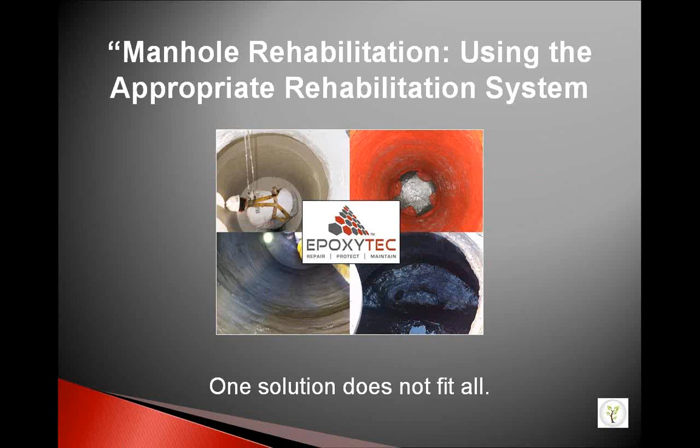So as I mentioned, manhole rehabilitation: we're going to be talking today about using the appropriate rehabilitation system, because one solution does not fit all. Okay, so I'm going to give you a brief outline now. If we can flip to slide number 2, please.

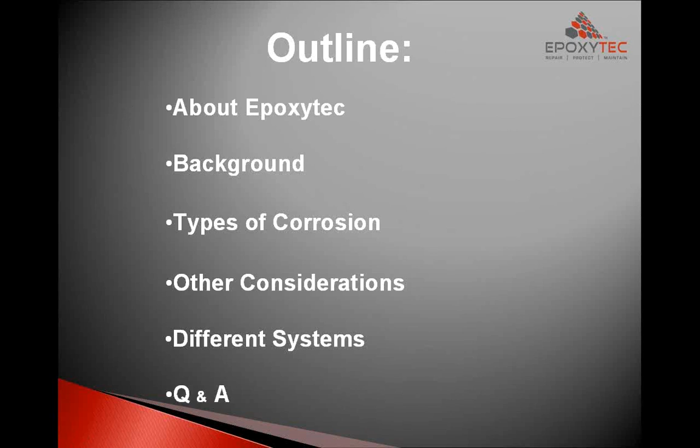I'm going to tell you a little bit about Epoxytec. I'm going to give you some background, pertinent perspective information about the industry and why it is we're discussing today. I'm going to then talk to you about some of the typical generic rehabilitation options that I'm sure most of you are familiar with or have come across at some point. And then we'll look at some of the factors that you need to consider when determining the right system or the right solution for rehabilitation.

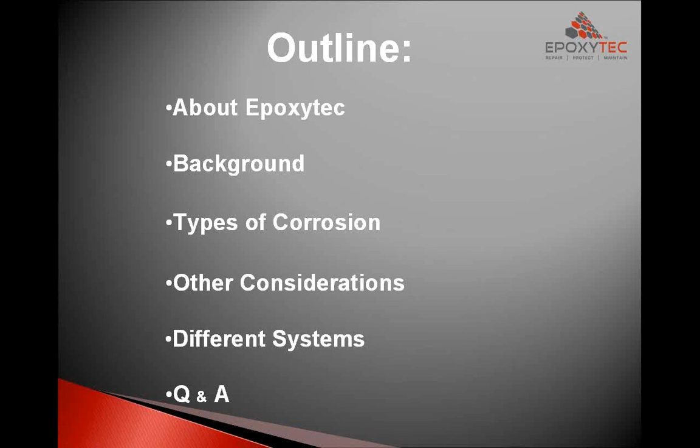And we'll look at the different systems. At Epoxytec, we came up with what we thought were 4 systems that help you meet most of these criteria. And then we will take a short Q&A to take any questions regarding any of the material that we've discussed. So, without further ado, I'm going to tell you a little bit about Epoxytec.

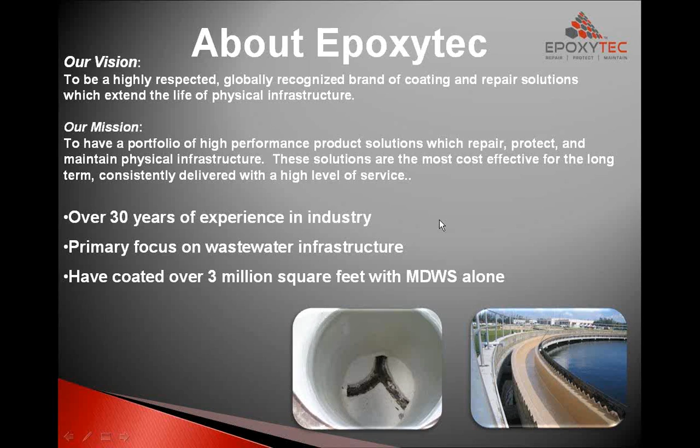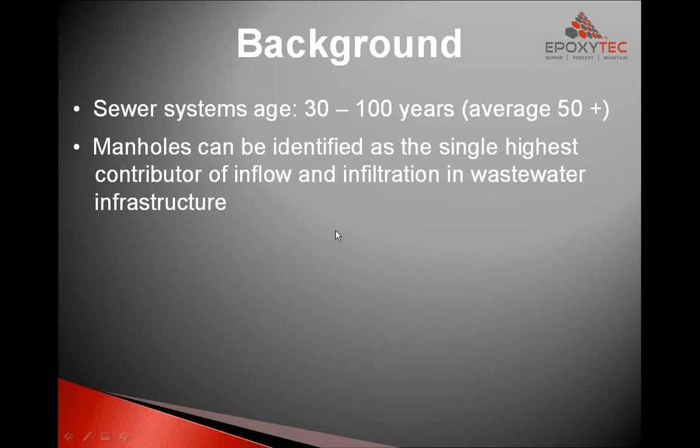Thank you. And now can we move on to give you a little bit of pertinent background that I think will help put this presentation a little more in perspective. The sewer systems in the United States are between 30 and 100 years old. And most of you are shaking your heads and thinking, yeah, close to 100 years, I know. The average is supposed to be 50 years plus. And that obviously is the problem.

Most of these systems have been designed for a 30 to 40 year lifespan, and most of them, as you probably know, are way beyond that original design life. Manholes themselves, which we're focusing on today, can be identified as the single highest contributor of inflow and infiltration in the wastewater infrastructure. There's a lot of debate about this, but there's no question they are amongst the highest. Somewhere between 30 and 60%, depending on which statistic you quote, of inflow and infiltration is actually caused at the source of a manhole.

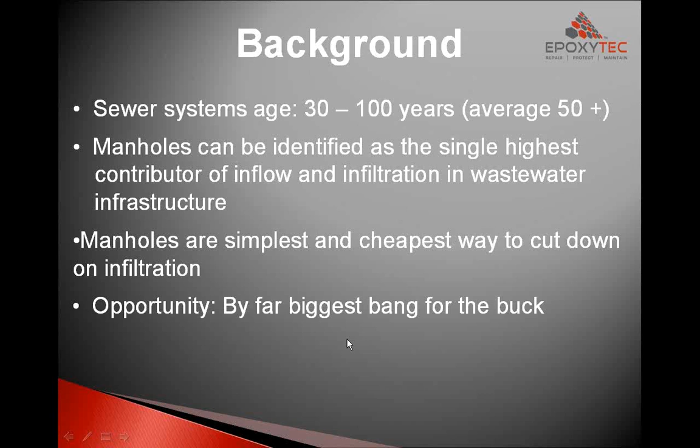Manholes, however, are the simplest and cheapest way to cut down on infiltration, and therefore we have an opportunity here. By far the biggest bang for your buck can be spent on rehabilitating your manholes. Simply put, if you want to save the capacity, maintenance, and expansion cycle of the most complex and expensive part of your wastewater infrastructure, namely your wastewater treatment plant, you can do this by simply investing smaller amounts of money in the infrastructure which is the simplest out there, namely your manholes and manhole rehabilitation. Okay, let's move along.

Let's briefly look at the types of corrosion that we experience in the wastewater infrastructure system. As I mentioned, inflow and infiltration is a big one. A lot of people want to rehabilitate manholes for the simple reason that they have major inflow and infiltration. When we talk about inflow and infiltration, it's affected by sea tides if you live near an ocean or lake. It's affected by the amount of rain you have, groundwater.

All of these items cause hydrostatic pressure to be placed on the outer structure of the manhole. Manholes are typically made of brick or concrete, which as we all know is porous, and over time this water works its way through into the structure, which essentially gets fed down to your wastewater processing plant, majorly increasing the capacity that has to be processed. And over time it also deteriorates the structure because it breaks down the concrete, or the brick in that case, as it comes through it.

The second one is hydrogen sulphide. These are the gases that are emitted from the wastewater that cause bacterial buildup inside the porous concrete. Now folks, we all know any concrete you use is still porous. It's like a sponge, so bacteria harbors itself inside the coating or inside the concrete and causes sulfuric acid buildup, which essentially deteriorates the concrete, causing the structure to become compromised.

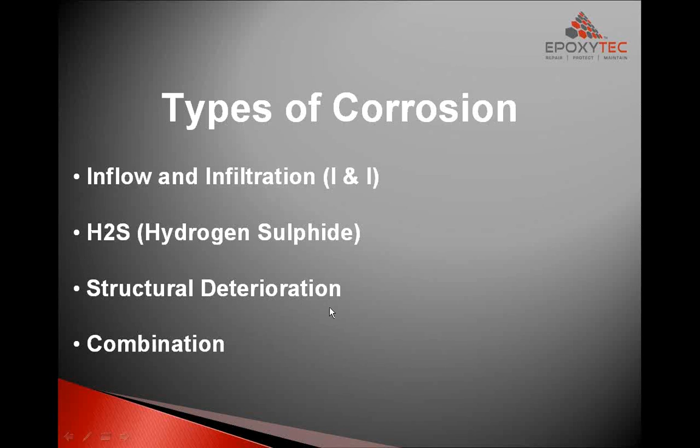And then thirdly, we have structural deterioration. This is typically caused by number 1 and number 2. However, sometimes you may have a very benign system that has very little hydrogen sulfide and not very much inflow and infiltration, but over time it still breaks down. An example might be a city that has manholes that are 50 or 60 years old, and even though the conditions may be fairly benign, they're still in need of structural rebuild. However, typically we find that most manhole underground structures are actually affected by a combination of all of the above. So let's move along.

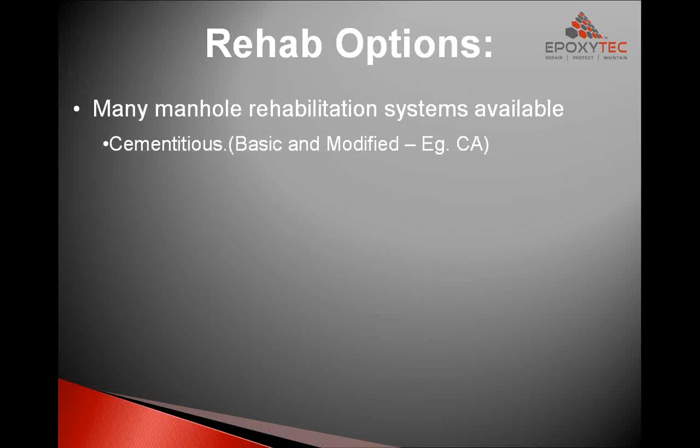Some of the typical generic rehabilitation options that some of you may have come across, I'm going to list really quickly. There are many rehabilitation systems available today. Most of them are coatings or single applications. The first one, one of the most common and probably the very first type of rehabilitation solution, is cementitious rebuilding or relining. We have different types of cementitious products, namely basic Portland cement mortar rebuild, and then some of the more sophisticated modified ones. For example, calcium aluminate infused mortars that improve the chemical resistance and improve the permeability to some extent to make the rehabilitation using a mortar system more successful.

Epoxies are the second one. We have liquid epoxies that can be brushed, rolled, or troweled on. And then we also have trowel-applied structural epoxies, some of which have aggregates in them, some have fillers, nylon fillers, mesh, etc. We then have some polyureas. Some of you have come across these. You get the structural type polyureas and the flexible kind of polyureas. We have cured in place solutions. You get inserts, HDPE inserts, PVC inserts, fiberglass inserts, very similar to the cured in place in some cases.

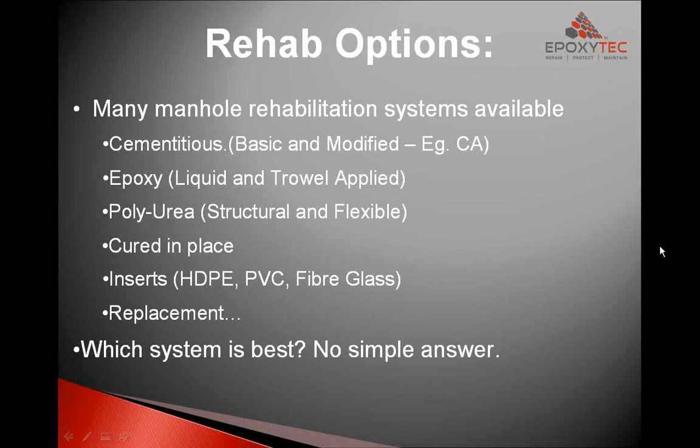And then of course we have replacement. Very often when people are talking about rehabilitation of structures, replacement is always one of the options being considered as a comparison in cost-benefit analysis. So people always ask me, which system is the best to rehabilitate my particular structure? And I always say that there is no simple answer. All the coatings or systems I just mentioned are excellent. They're very good for what they're intended to be used for. If they are used in the right manner, in the right environment, they're all very good systems. However, they have to be picked carefully and used in the right area to be at their most successful. So let's move along.

That takes us to poll question number 2. What is the primary form of corrosion experienced in your system? Now that we've learned a little bit about corrosion, why don't you let us know? Do you typically experience mostly inflow and infiltration, hydrogen sulphide buildup, structural deterioration, perhaps a combination? Or if your city has no manholes in it, then this would not be applicable.

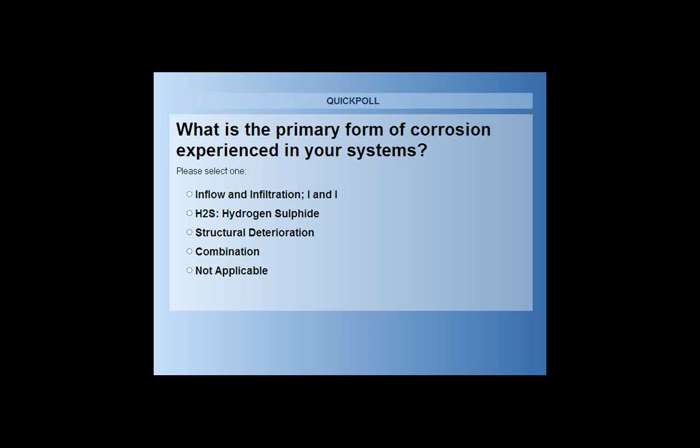Okay. Let's look at some of the other factors that would influence a type of rehabilitation selection. First of all, we always have to look at budget constraints. We would probably all like the best possible rehabilitation solution, regardless of the expense. However, sometimes the budget does not allow for this. So we have to make sure that we have the right product that meets the budget for the particular project in mind.

We have to look at the life expectancy. Okay, we have to amortize the cost of the rehabilitation over the life expectancy of the project. If we have a system that we know is only going to be in place for, let's say, 3 years, I know this sounds unusual, but sometimes a client comes to us and says, Dimitri, I have a manhole. This manhole is going to be replaced in 3 years because we're building a state park over here and we're no longer going to be running this entire line. But I need to focus on rehabilitating this for the next 3 years. Well, that'll be a different proposition to a manhole that we know is going to be there for the next 20 or 30 years. So we have to look at the cost over the life of the project.

Then next we have to look at some environmental factors. There are a lot of areas in the country that, for example, don't like using coal tar anymore. That's one of the systems I'm going to discuss with you in a little while. Because it has solvents, it has some potential leaching into the environment. There are some areas that require 100% solids only. So these are factors we have to consider when selecting and or recommending a system for rehabilitation.

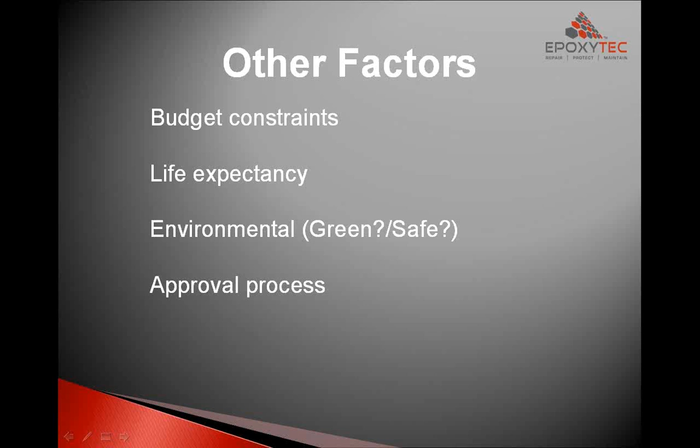And then the last one is the approval process. A lot of times I may get a maintenance manager coming to me and saying, Dimitri, I'd love to use your 100% solids trowelable epoxy. However, it has not quite yet been approved by an engineering system. So at that point, it cannot be used. We may have to opt for something a little different, like a cementitious or a calcium aluminate that has already been approved by the system for use. Okay, let's move along.

At Epoxytec, what we realized was that with all these complex solutions out there, with all these corrosion problems, different needs, it was sometimes a little confusing as to what type of system or product should be used. Instead of offering people a product, use a roll-on epoxy, use a calcium aluminate mortar, we felt it might be easier to categorize the rehabilitation in the form of systems. So we came up with 4 systems that we thought would pretty much cover the gamut of most of the requirements out there in the market. So if we start with system number 1, structural epoxy. This is a 100% solids, trowelable, 16,000 psi compressive strength, single coat epoxy system.

Let's look at composite system number 2. This is an epoxy composite system where we have a sewer grade mortar that's top-coated by a urethane-modified liquid epoxy. It can be brushed, rolled, or sprayed on over the cementitious mortar rebuild. Then we have number 3, which is a calcium aluminate system. The calcium aluminate system, as I mentioned before, is a calcium aluminate infused Portland cement system. This offers much better chemical resistance and permeability than a traditional mortar type system and gives you a structural rebuild.

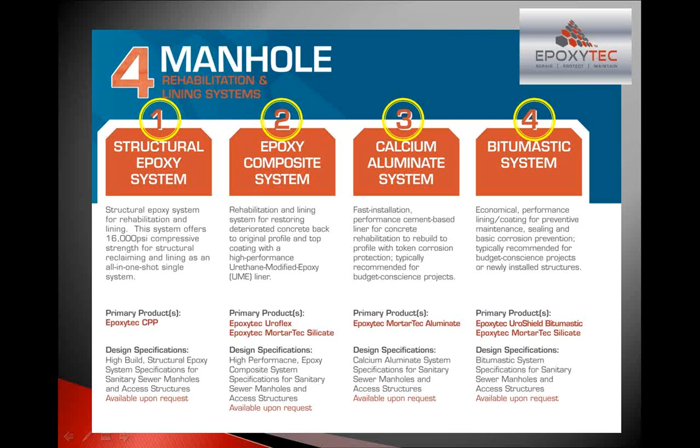And then number 4, our bitumastic system, which is also known in the industry as a coal tar. Coal tars have fallen out of favor a little bit, but they still do have their place. This is a product that has some solvent in it, and we typically recommend it as a liner, either on its own or with a cementitious rebuild to go along with it. So let's move on. Now let's look at each one of these systems in a little more detail.

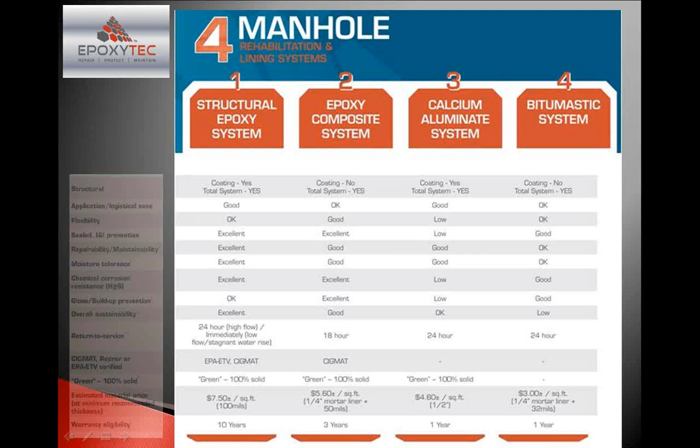Firstly, we have the structural epoxy system. Okay, as we can see, if we go down the list of all the criteria that are listed on the far left side, let's highlight a few of them. The structural epoxy system is an excellent deterrent to inflow and infiltration. It's repairable, which means the system can be maintained and repaired over time.

It has very good moisture tolerance, which means, as we all know, in these underground structures, it's almost impossible to get a perfectly dry substrate on which to apply your liner. This trowelable epoxy bridges that gap of concern when moisture does still exist in the system. We have a plethora of third-party testing on this kind of product. It's tested by the EPA, ETV. It's got CIGMAT testing.

It is 100% solids, and therefore passes the green test without any solvents or anything of that sort that may otherwise not be accepted. And it is eligible for approximately a 10-year warranty when it is applied by a certified trained applicator. Pricing-wise, as we can see over there on that sheet, we're looking at about $7.50 per square foot for application, material only, of course. Or in terms of linear foot on a 4-foot manhole, we're looking at about $95 per vertical foot.

Okay, so that was our structural epoxy system. Now let's look at our epoxy composite system. Our epoxy composite system would be, as I mentioned, a sewer-grade mortar that's top-coated by our urethane-modified epoxy. This has some flexibility to it because the urethane modification gives us about a 38% elongation. It is pretty good for I&I prevention. Okay, it has excellent chemical resistance. Epoxies are pretty good, and once you add a urethane modification to it, it becomes even better.

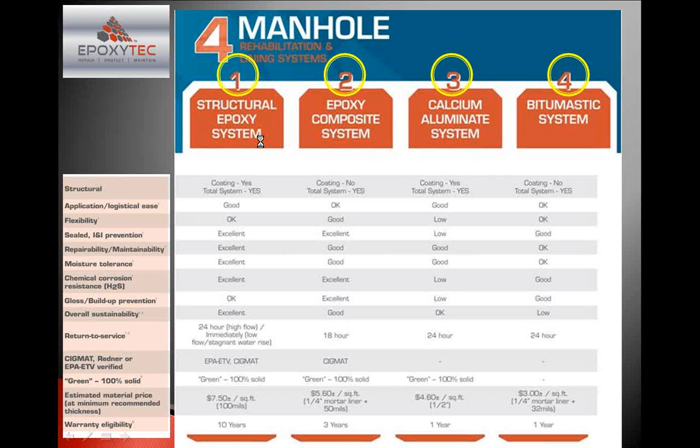So that takes us to poll question number 3. When you're looking for a manhole rehabilitation solution, what is the most important influencing factor? Is it A, price, B, convenience, C, performance, D, the most economical over the long term, or E, not applicable? You can take a moment to answer that.